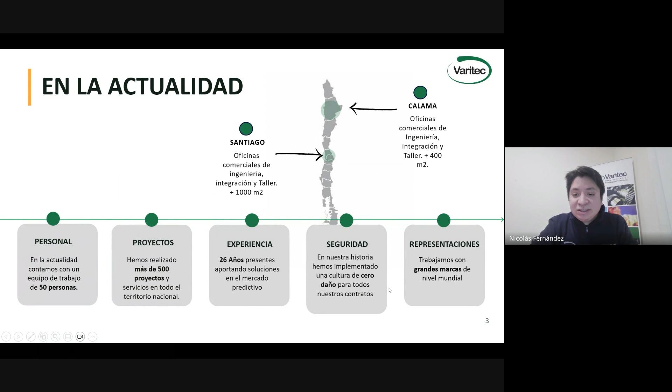Para bajar un poco a la parte más técnica: las marcas que trabajamos e integramos son PCB Piezotronics y Endevco, el área más potente en instrumentación, monitoreo industrial e investigación y desarrollo. Complementamos esta solución con sistemas de adquisición de Dewesoft, y también podemos aportar sistemas de calibración de Modal, una división dedicada a sistemas de calibración dentro de PCB Piezotronics. Esa es una mirada general de las cosas que trabajamos como empresa.

El webinar de hoy se enfoca en uno de los tipos de sensores específicos dentro del catálogo de PCB. El primero se enfocó en acelerómetros piezoeléctricos, después nos enfocamos en micrófonos, ahora vamos a sensores de fuerza, y más adelante vamos a ir viendo aplicaciones más específicas de estos sensores, como análisis modal o mediciones en ambientes específicos, mejores prácticas en terreno y otras cosas en webinars futuros.

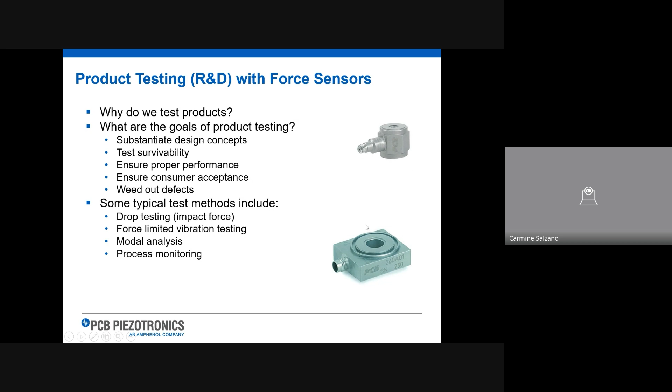You can see from now already two different shapes. A very general purpose one, I hope you can see my mouse cursor. It's a very general one. And this is the ring style triaxial. So they seem different, but they are both force sensors for different uses and, of course, specifications.

Piezoelectric. The difference is that we have two technologies. One is piezoelectric for force sensors, so purely dynamic force sensors. The other one is strain gauge technology for load cells, but these are purely for static. And Nicholas will show both afterwards. We manufacture both sensors. I repeat, piezoelectric for purely dynamic force, which is what we will discuss today. So the difference is very big.

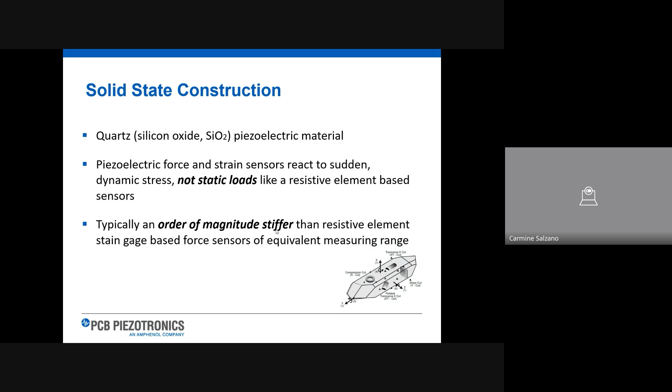I will discuss the stiffness later, but you can see pretty much the quartz bar where we cut and build up our sensor. And the sensor is always built on the principle of the piezoelectric effect, which means any silicon dioxide, when subjected to a force, will have a different polarization of the asymmetric lattice under load, and therefore you will have a charge output.

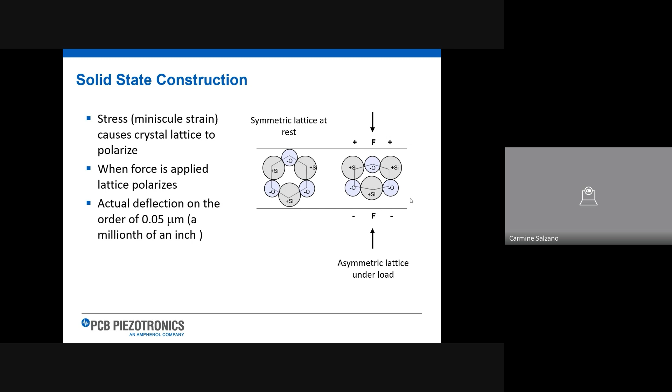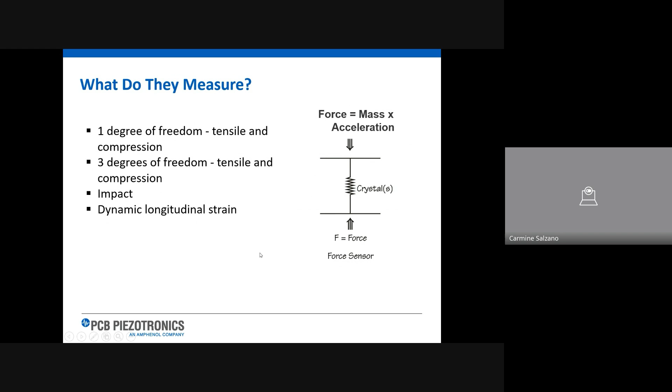With this charge output, you don't have to imagine a very big change in the structure, or that you will see the structure move. These sensors are very stiff. You will not see any movement. But the principle is always Newton's force, because you have mass times acceleration, so you can also measure on this basis. The force sensor, how is it designed?

It is a very stiff metal, and inside, the heart of the sensor is a crystal, like quartz, for instance, and an electrode. The electrode collects all the charge accumulated on the surface of the piezoelectric material. You can imagine a very slight quartz crystal. And the output here, at this point, is picocoulombs per Newton. So it's a dynamic force output, but in charge.

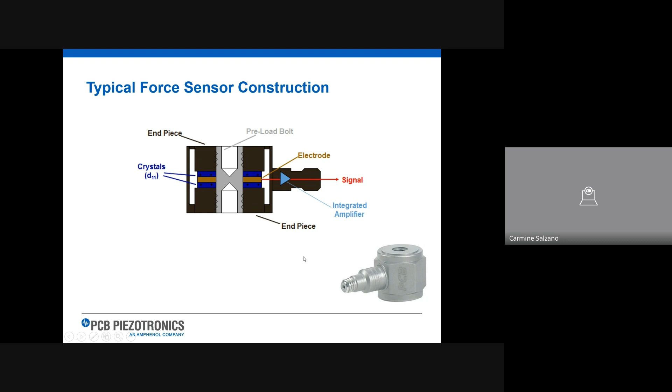However, if you use a MOSFET inside, a microelectronic, with this microelectronic we transform the high impedance charge output to millivolts, so voltage output, which is very easy to handle, not only with the data acquisition, but also using a very long signal cable. So very common today. But we still manufacture both types, charge output and ICP or IEPE output.

You can see a better picture. This is a real one. The 208 series is one of the most common. You will see it's very small, very practical, very wide application because you don't need a preload. Preload is an advanced situation which I will explain when I talk about ring style. So this is simply stud mount, or glue, and measure.

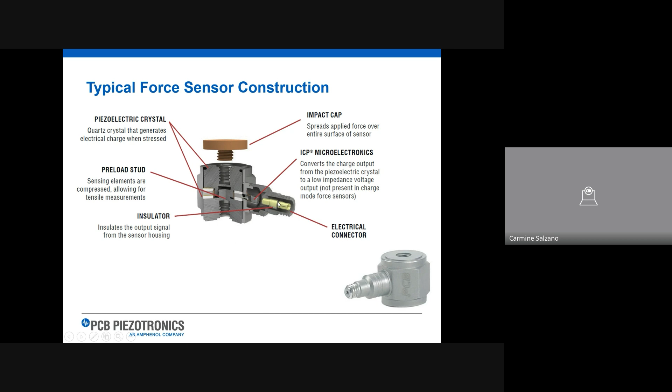You can see the preload; the crystal stack is here, as I showed you before. This is a real picture. You can see how small it is, and then you have just the thread to mount properly either the cap, because this can also be used for impact, or to mount on a structure, and below you can mount the stinger connected to the shaker in case of modal analysis. And then you can see the microelectronic. This microelectronic transforms the charge output to voltage output before going to the connector output.

Specification: as with any other piezoelectric sensor, I would say any other sensor, the sensitivity is the most important parameter because it gives you how many millivolts you will have for each Newton or kilonewton output. Therefore, based on the 5 volt, which is a typical output voltage of a force sensor, you will see automatically the measurement range in compression and tension, because most of the sensors can use both.

Of course, to use tension, you need a particular application for both base and top mounting in order to measure also the tension. What is the maximum static? Well, remember that the dynamic force, the compression measurement range, is just the dynamic portion. You will not measure any static with this sensor. So the maximum static is the sum of static plus dynamic.

Why do we need this one? Because even if the sensor measures up to 10 pounds, it can resist up to 60 pounds, even without measuring. But it is very important to not go above this, because otherwise the sensor will break, even if it has a huge stiffness compared, for instance, to a static load cell.

And then, of course, the typical low frequency, high frequency. The high frequency typically depends on the structure of the sensor. Why such a high frequency range compared to a load cell? Because the stiffness is much higher in terms of design. However, the low frequency depends on the amplifier, the electronics. The electronics can be outside if it's a charge output sensor, or inside if it's an ICP, of course. And with ICP, in this case, the low frequency response is fixed. The rest is something that can be very easy.

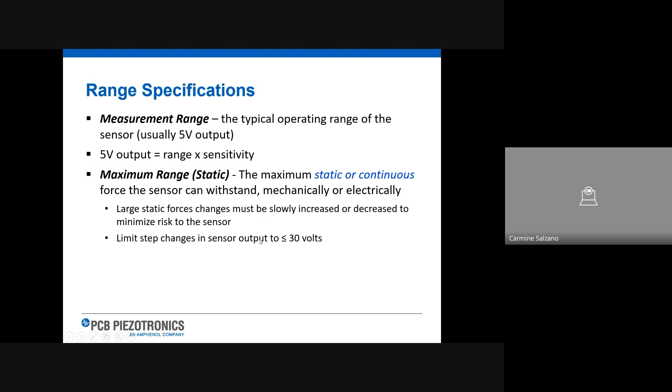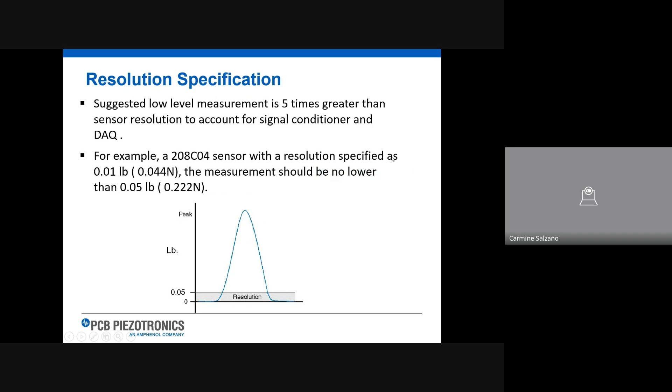So I already mentioned the range and sensitivity that is defined at 5 volts. Once you have the sensitivity, you will see the range, which is simply 5 volts divided by sensitivity. So it's also fixed, especially for the ICP force sensor. Resolution, what is it? It's the minimum level that it is able to measure. So of course you want to stay a little bit above the resolution in order to not measure the noise. But anyway, the resolution and the range define the dynamic range of the sensor, which is very, very broad, like any other piezoelectric sensor.

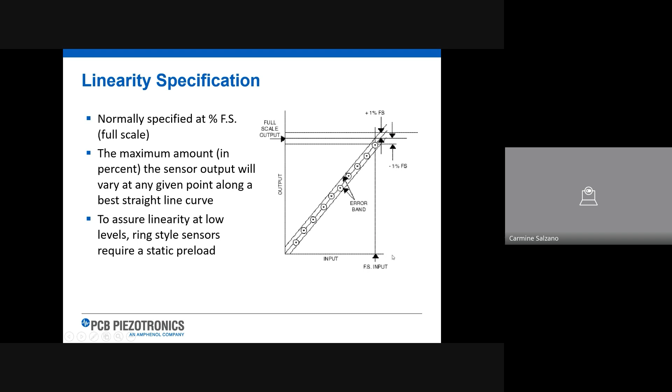Also, linearity is important because it defines the accuracy, which means that when you increase the level, you will stay in this bandwidth, and the sensor has only 1% of full scale linearity, which means it's very close to the straight line, and this ensures the very precise measurement of this sensor. I already explained the response; the resonance defines also the maximum frequency, because once we define the frequency, we can say 20% is the highest frequency you can measure. But of course, all these parameters you can find in the specification, so you don't have to worry.

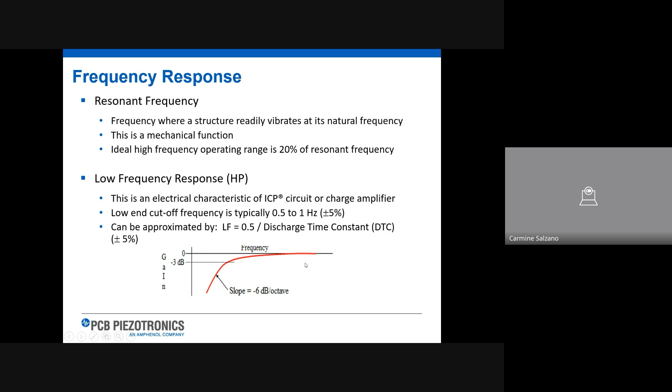Also, the discharge time is connected to the low frequency response, which is the typical response of any filter, which is not straight. So the frequency range is where the curve is flat. Where it's flat, of course, you have the same sensitivity at any frequency. So this is the working frequency range of the sensor. Now let's go to some specific force sensors, because what I said so far is pretty much for any piezoelectric accelerometer, force sensor, or pressure sensor.

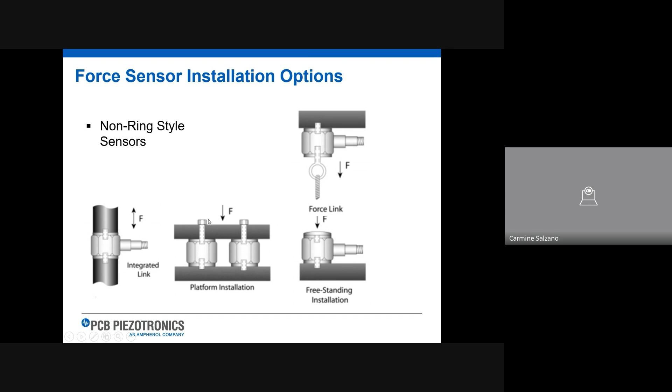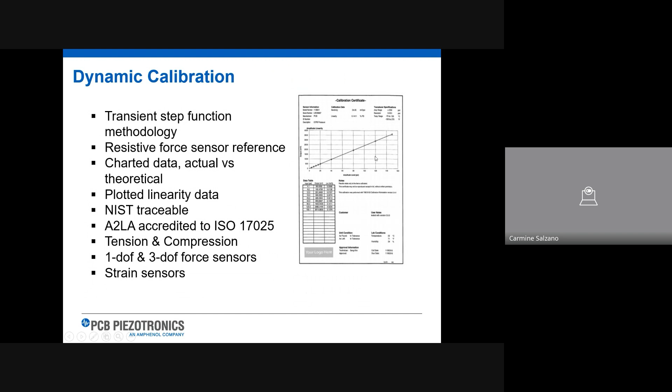Now the application, the mounting, is slightly different. First of all, you need to have a very close mounting base, like for an accelerometer. But in this case, sometimes you want to mount it like a pancake between two plates, because you want to measure also the tension, not only the compression. So of course, you need a particular application. But before looking at this, look at the calibration. Every single sensor is calibrated, like any other PCB sensor, with the linearity and also the specific sensitivity.

Then we have another sensor, which is a ring style. The mounting of this one is slightly different from the previous one, because with the ring style, you need a preload. Why? You need to mount it like a pancake between two plates. And then between them you have a stud. We supply the stud, and the stud is calibrated with the sensor, because in order to ensure linearity, you need a certain preload. So you tighten the torque, the sensor, the stud, between the two plates in order for the sensor to be fixed between these two plates.

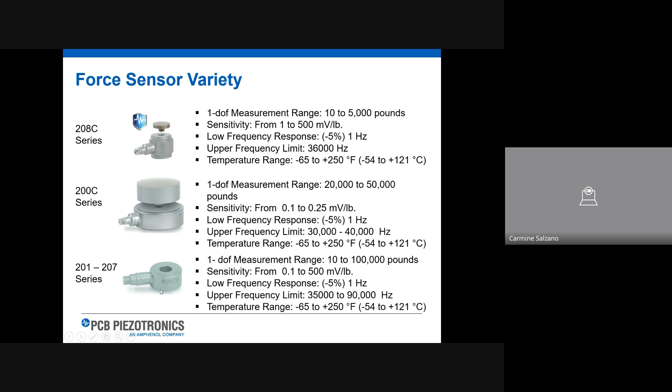This we call preload. And we define how much preload we need to give to this force sensor. Of course, we have a procedure for preloading properly the sensor between these two plates. Only the ring style sensor, this one. This is single axis. But of course, if you want to avoid the preload, then you can buy a sensor which is the same, you can see here, but preloaded between two plates, two interface rings. The same is for triaxial.

These are triaxial ICP, which is also available in charge output, and triaxial with a 4-pin connector with the 3 axes, so X, Y, Z, and this one has a stud, which is calibrated together. If you want to use your stud, you should ship it to PCB for calibrating. However, mounting with its own stud between two plates, you need a preload. Again, preload procedure. Otherwise, you can see the sensor is the same between the two plates already preloaded. You don't need to do anything else in this case. Of course, you need to accept the sensor is slightly taller.

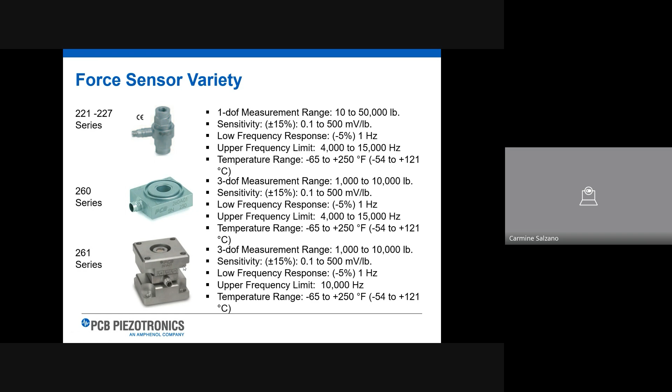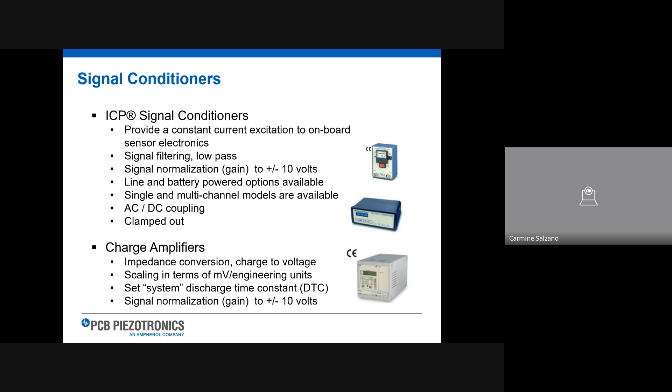Okay, I hope I gave you a little insight about some different shapes of the force sensor. So a force sensor can measure the tip of a shrimp, just to give an idea, up to very high shock and impact. So we have different types of piezoelectric force sensor. Of course, the conditioner, in this case, you can go directly with the data acquisition, but honestly, you can also use a DC coupled conditioning mode only for preloading, because preload is a purely static operation in order to ensure that the ring style model is preloaded. That's another convenience to use, when it's possible, the 208 series, which does not need preload.

And the application, of course, I have no time to explain all the possible applications with this sensor, because also I want to have your questions. So I selected a couple of applications which are covered by papers which you can find on the website. And you can read yourself: in any application, aerospace, automotive, or any general test, even material testing, drop test, quality control, component test, you can use a force sensor to measure the actual dynamic force on the sensor.

But it's not only dynamic. For a few seconds, you can keep also the static with this sensor, because the microelectronics inside the sensor has a long RC circuit. So the DTC is very long. So you keep it static for a certain while. But of course, not like a load cell. And Nicolás, right after, will show you this simple demonstration.

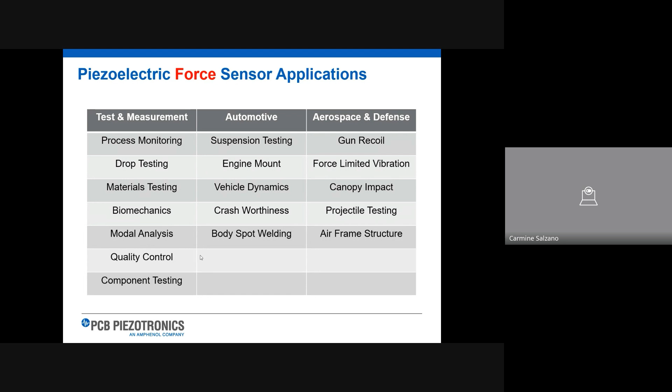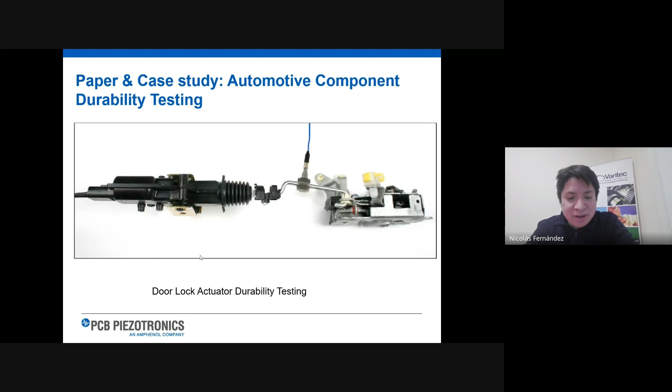So let's start with the final part of my presentation. And I really apologize if I've spoken too fast, but let me know, Nicolás, is it so far too fast? Yeah, it's okay. I think maybe a bit slower is better. But okay. Okay. I will slow down now during the presentation of the two cases before my conclusion.

First of all, this is a car door lock, right? You can see these are mechanisms used to lock the door of the car. So very common. And of course, what do you want to measure? You want to measure the force during locking, right? To open and close the door of the car. You can see here a very simple 208 mounted in this beam here in order to measure the force of tension and compression during door lock actuators working.

This is good, but at this point you can see why we don't use a strain gauge static load cell, which is also a little bit dynamic. Well, let's put up a comparison of different parameters of the technology advantage between strain gauge and piezoelectric. So force sensor, piezoelectric, and load cell, strain gauge. First of all, there's no comparison about stiffness. Stiffness is much higher in piezoelectric. Also dynamic response, of course, is very high.

So I don't want to go through all this. You can see even the range is very high. Sensitivity is very high. Temperature effect, everything is higher. Where is the only bad point of piezoelectric? Of course, it is static. Because if you want to have a purely true static, then of course you need a load cell. But a load cell is much bigger than the other one.

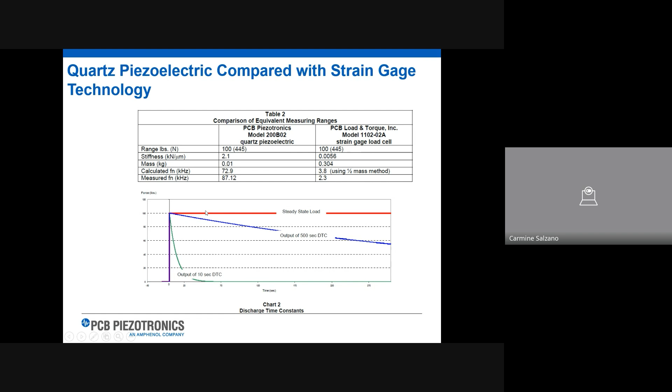Now we can see, however, the static response in this case. As you can see here, the discharge time constant is how long it can keep the static. You can see they are both the same range of Newton. The stiffness is different. The mass is also different, and of course the frequency. But if you have an event which is quite small, short, the sensor is able to measure very short events, slightly bigger, because the DTC is 500 seconds in this case. And then you have the steady load. Steady load is a load cell, only if you want to use, in this case, a load cell.

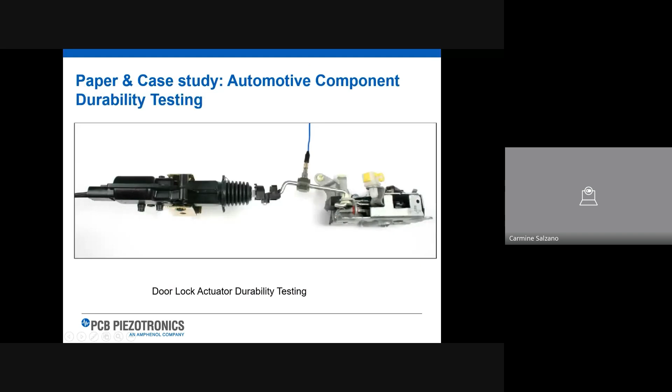Let's see the comparison, and this is one of the most important reasons why, for this kind of application, you cannot mount a load cell, because it's too big. Okay, therefore you can see the sizes. There is no comparison, right? So for this application, absolutely you cannot mount this load cell. Okay, and also this is a final remark regarding the frequency.

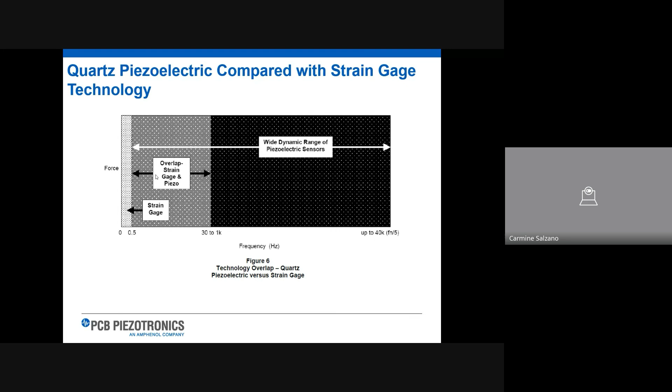So when you want to measure up to 0.5 hertz or below, very close to 0 hertz, strain gauge technology, so the load cell, is the only choice. When you want to measure from 30 hertz up to any kilohertz, then of course the piezoelectric sensor is the only hope. When it's between 0.5 hertz and 30 hertz, in this gray region, this is an overlap, which means eventually you can use both. But in this case, of course, there are other questions like dynamic range, like the size, and so on. So in this case, you can make a comparison in this range. Okay, that's the first point.

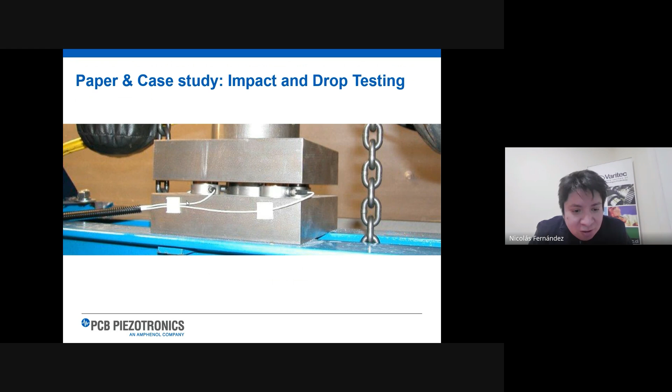I don't know, Nicolas, if I was speaking slowly, if I can stop for a second to wait for your questions eventually. Let me know. Hello, Carmine. I think it's good speed. Before going to the last case study, is there any question? Or do you prefer to take questions at the end, okay? Sí, I think es mejor al final. Okay. So, is the speed okay?

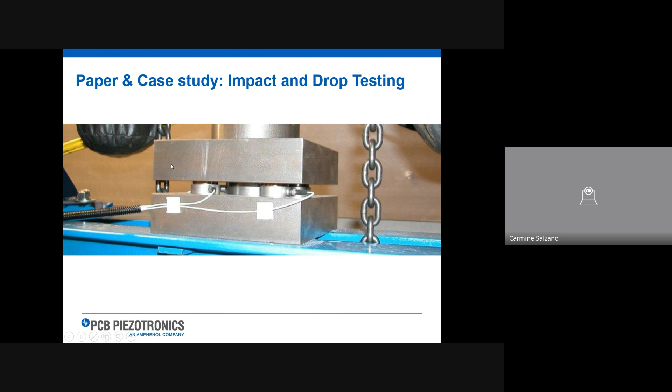Yes. Okay. Now, the second one is an example of impact drop. Again, in the automotive world, you can see this is a bumper test. It's a bumper in a machine. You can see this machine. The crosshead here is equipped with four force rings. Force rings, as you probably remember, need a preload between two plates. Like this case, you can see 1, 2, 3, 4 sensors between two plates. In this case, we built a force plate inside this crosshead.

Now the crosshead mounted on the machine hits the bumper. The bumper you can find on the highway or wherever, right? So it's very important to test the bumper to see if it resists the crash of the car. So you can see the bumper in this impact, and it is measured by this force plate. Why a force plate with four sensors? Because the level is very high. Mounting four, you can multiply the range of one sensor by four, and you can see the force and the total energy.

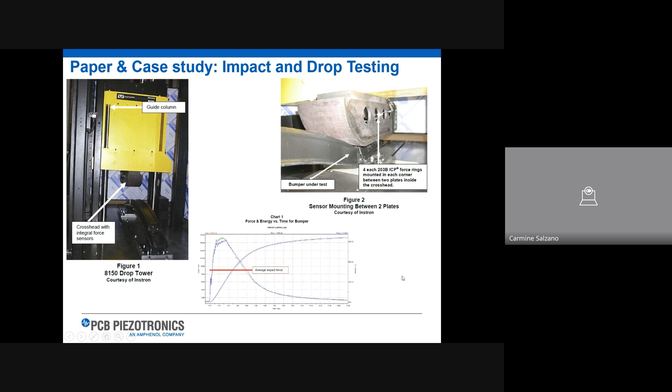So which was the choice? The choice was this sensor, just because you can mount in a force plate with the 4 units. You can see 3, of course, because the other one is on the other side, mounting each one in a corner of 4 square plates. And of course we chose this sensor here, 203B, for the ranges, okay? The impact range.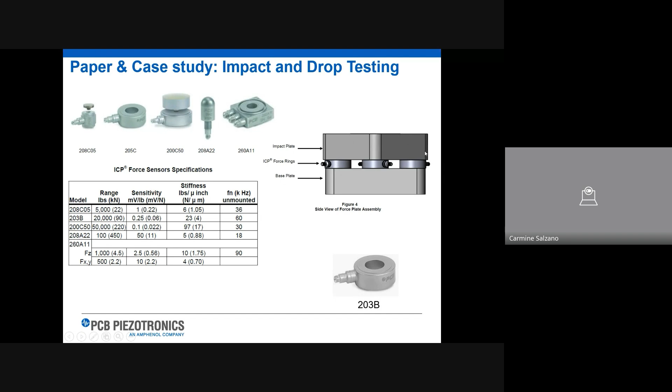So the range of 203 is like 90 kilonewton times 4, because you use 4 in this kind of plate, and the plate is mounted inside the crosshead. So everything is subjected to impact, and the impact spreads all over the plate and equally excites all the force sensors at the same time. That's the concept of force plate. Probably you can see better here. You can see the force 4 plates.

Now you can see something different, because of course the F in the 3 directions, X, Y, Z, you can measure, okay? Simply online or offline. It's very interesting because in this case you can measure the total force in the 3 axes. But look at this, you can measure also the moment. Yeah, because if you multiply the force in this direction times the distance where you mount the sensor, then you can measure it. Okay, that's a formula.

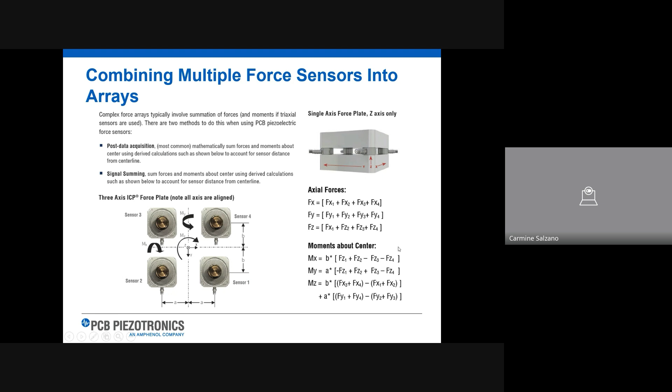So the very interesting thing in this force plate is that you can measure the total force in the 3 axes and the total moments in the 3 axes. So you can see how it's important not only for impact, but for any other application. Okay, now keeping this concept, we go to the satellite test.

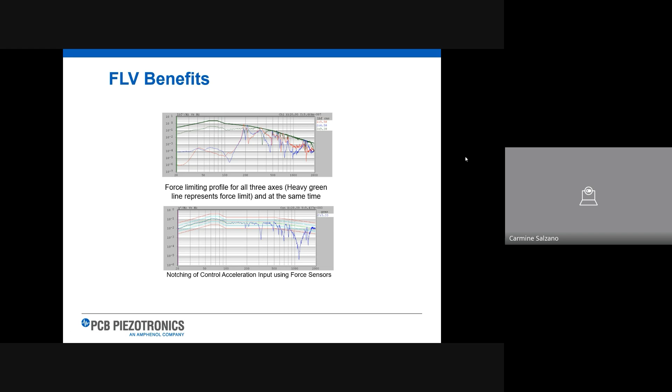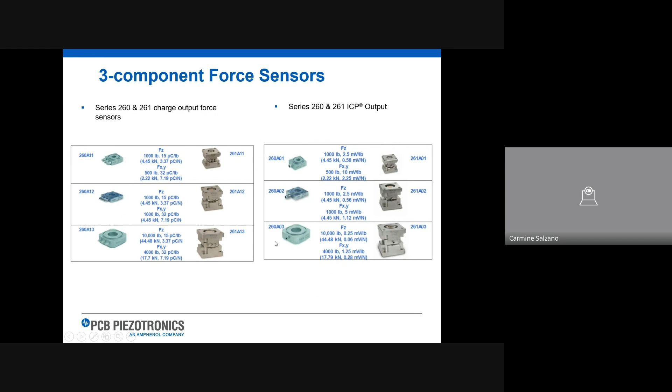I will go very quickly, but here in the satellite, you want to notch, you want to make sure you do not overstress the satellite, otherwise you damage the satellite, and you know the problem. So it's not enough to notch only the feedback through the accelerometer, but also through the force sensor. You can see here, charge output and ICP output force sensors, ring and link.

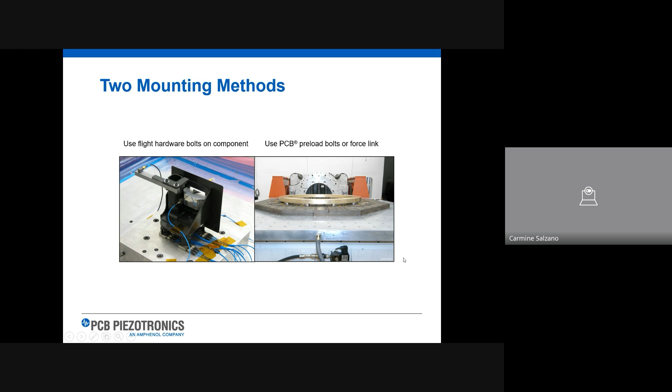You can see that without any plates, you can measure directly the force on the component bolt. However, here you have 2 plates prepared by the customer, and the total force is spread over them. It's divided by single sensor, of course, in order to achieve the wanted total force. Again, you can see the now familiar total force and total moment calculation. Sometimes you can do it in real time.

Okay, I would like to take a break before the conclusion to show you a unique sensor. I know this is not a force sensor, but when you deal with force sensors, sometimes you need a strain gauge, foil strain gauge, to measure the strain. But in this case, the strain gauge you cannot dismount. However, this is the only reusable strain gauge.

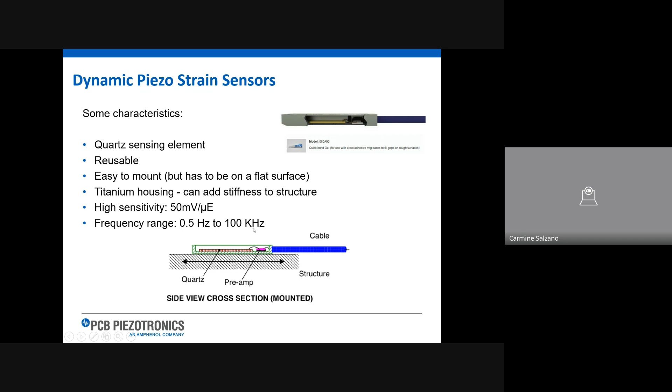You can see a quartz plate with the ICP, so ICP output. You can simply glue it with this glue. You can see the picture of the sensor inside, and it is the only reusable strain sensor in the world with high frequency. Of course, it's purely dynamic, but very high frequency and very high sensitivity. This is an application here mounting on a snowboard on ice, where of course you cannot mount any strain gauge foil. However, these gauges were mounted during snowboarding.

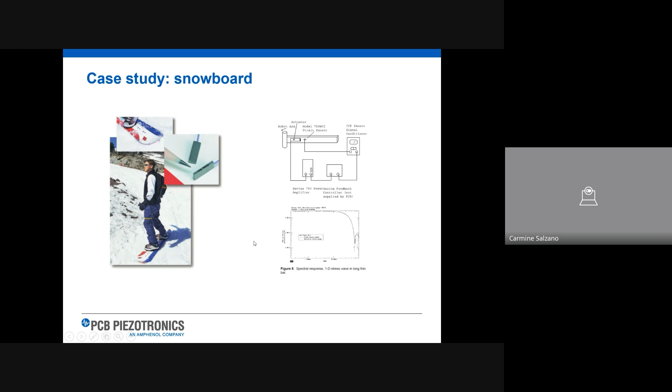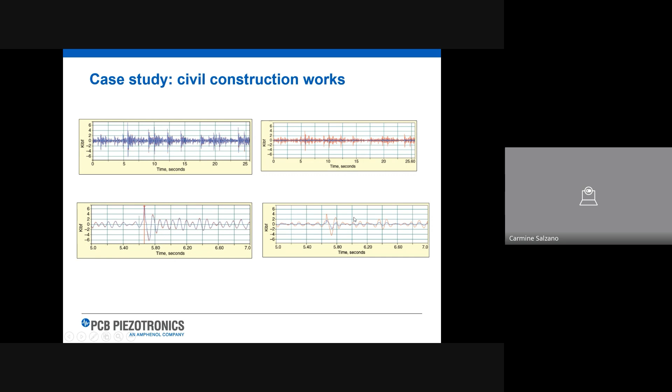Another application is in civil construction. You can see the difference between the foil strain gauge and the only reusable strain gauge. Mounting on 2 different pillars, it's very easy to discover pure axial loading and axial plus bending loading on 2 different columns in the civil construction work.

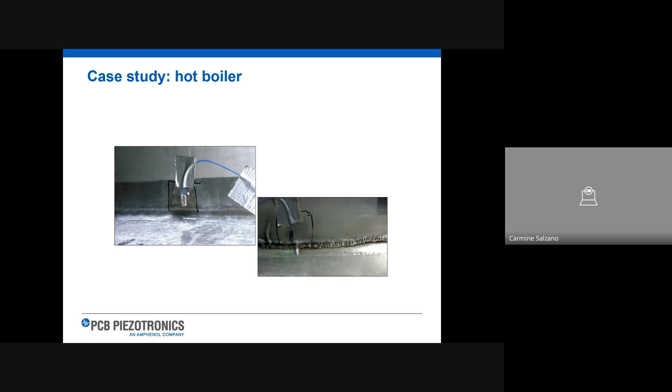But as a final example, very quick, because I have a dedicated presentation for this sensor application, is on a hot boiler at 80 degrees Celsius during operation, where you cannot mount a foil strain gauge. However, the sensor is able to define not only the good and the bad boiler, but also the frequency, in order to see also this parameter compared to the accelerometer.

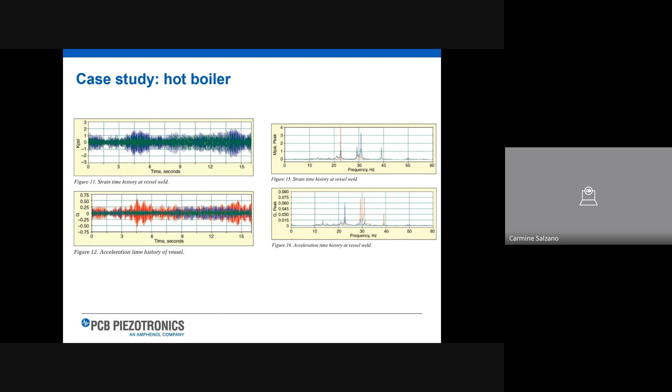Okay, I conclude my presentation. Thank you so much, and I'm sorry if I spoke too fast, but really I would like to leave the time to Nicolas and to your questions and my answers. Thank you very much. Muchas gracias.

Thank you very much, Carmine. Okay, I'm muting myself. I'm waiting for questions before your nice demo.

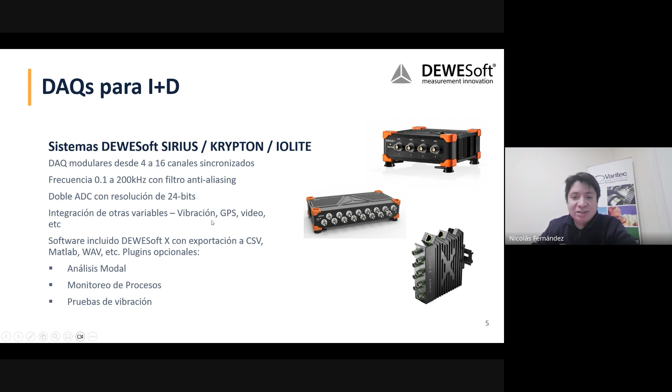DEWESoft siempre va a incluir un software base con el cual puedo exportar datos e integrar directamente variables como video, vibración o GPS, etc. Tengo a continuación una pequeña demostración dentro de DEWESoft.

Debería estarse viendo la cámara. Tengo conectado en este equipo 4 entradas para sensores piezoeléctricos, en las cuales tengo un sensor de fuerza con un filtro pasa alto de 0.1 Hz. Este es un sensor de 500 libras de fuerza, o 2.2 kilonewtons, montado sobre una celda de carga del mismo rango, también 2.2 kilonewtons. Esta celda tiene un filtro pasa bajo de 1 kilo, que en realidad no es nuestra frecuencia de interés; sobre esa frecuencia vamos a ver más bien ruido.

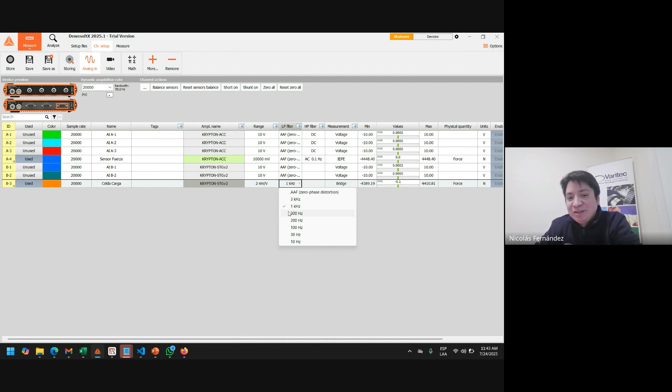Quiero hacerles notar las especificaciones técnicas de este sensor: puede medir hasta 2.2 kilonewtons y su peso es de 22 gramos. Si lo comparamos con la alternativa, con lo que pesa la celda de carga sobre la cual está montado el sensor, esa celda pesa 2.9 kilos. O sea, el mismo rango, con dos órdenes de magnitud de diferencia en peso.

Aquí están las mediciones superpuestas, sincronizadas con video. También tengo aquí otros sensores triaxiales, y para acoplar dos estructuras, force link sensors, que son triaxiales. Algo interesante que podemos ver inmediatamente: aquí tengo una forma de onda, una señal cruda, escalada al máximo, con el factor de escalamiento correcto del sensor según su certificado.

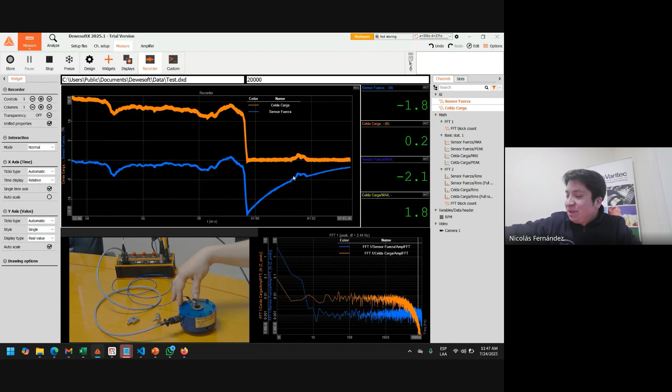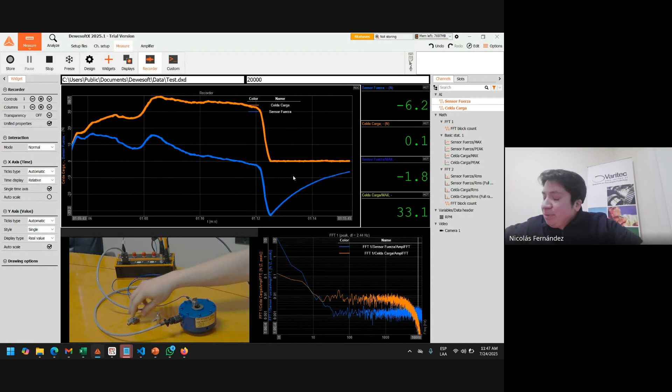Una cosa interesante que puedo generar con esto es que lo que significa precargar es que tengo que someter al sensor a cierta fuerza para ponerlo en su rango de medición. Específicamente en este sensor viene precargado, así que no es necesario hacer esto, pero por ejemplo con este modelo tengo que ejercer una fuerza específica durante la instalación.

Pero poder ver la diferencia entre la capacidad de medir una señal dinámica y una señal estática es el propósito de esta demostración, y también poder ver el nivel de ruido que beneficia al sensor de fuerza piezoeléctrico, que es especialmente útil, por ejemplo, en aplicaciones modales, donde estoy correlacionando esta entrada del sistema de fuerza con lo que sería, por ejemplo, la salida a través de vibración, sensores de aceleración o sensores de strain gauge conectados a la estructura.

Pero es un sensor que tiene una salida más amplificada que una celda de carga, y puede también medir cosas más bajas. Y también el tema del peso. Estos dos equipos pueden tener el mismo rango de medición. Para aplicaciones dinámicas, este es mucho más compacto, es más fácil de instalar, más barato de instalar, hay menos cables que recordar. Este cuesta menos, es menos sensible al ruido.

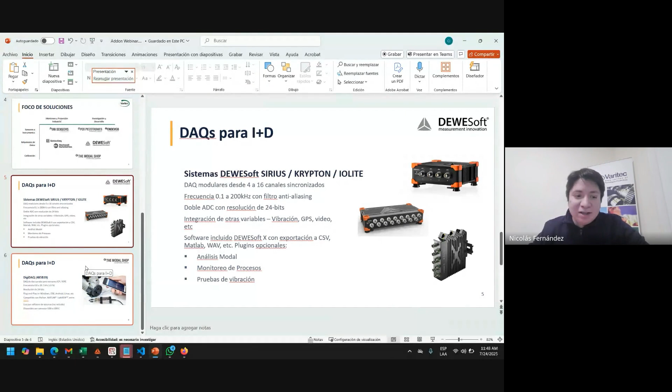Bueno, para cerrar, volver aquí a la parte de DAQs. Esto es un equipo Krypton dedicado con distintos canales para celdas de carga y sensores de fuerza. Realmente puedo conectar básicamente lo que sea. Y eso es como la demostración práctica para estos equipos.

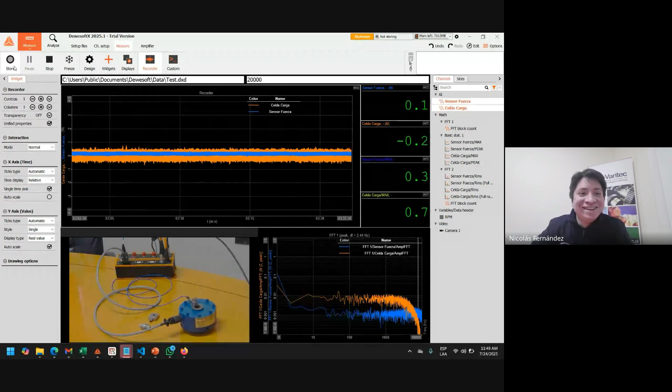Hola, buenas, ¿se escucha? Sí, sí. Gracias por el seminario, el webinar. La pregunta que tengo es que trabajo haciendo ensayos de impacto o de drop test.

Y la pregunta es si hay alguna forma con el sensor 208C05 de medir la energía. Energía, esto implica área, ¿cierto? Esto implica un cálculo donde entra el área, ¿correcto? Sí. Carmine, para medir energía.

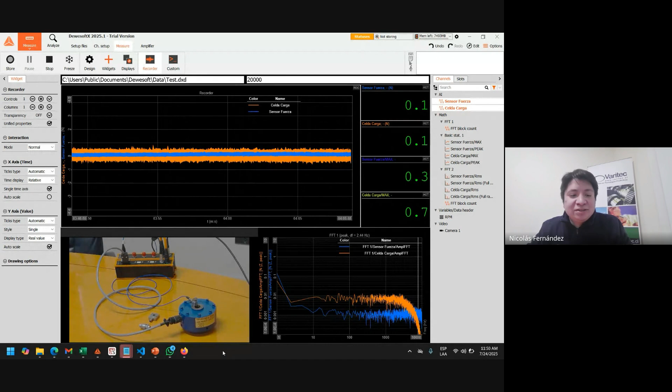So the only thing I can do, I can share my screen again. And I'll share where Nicolas will send you this presentation here. Hold on a second. Let me share my screen here. Can you see? Yep. Nicolas? Okay. Now, let me remember where I should take this one.

The energy. Okay. Force should be somewhere. Here's force preload. Creo que es, I think it's the drop test paper. Is automotive, yes. Okay. Is automotive. Hold on. Is in the automotive world. And

Yes, component durability, but not this one. Is in the white papers of force. I think it's the one I shared. It's on the Force. Yeah, this one. Anyway, one of these we show where to take this application, and I will send this paper to you, and you will see how to measure the impact. Is exactly the one I showed you before, the impact drop test, okay. This paper there. Hold on.

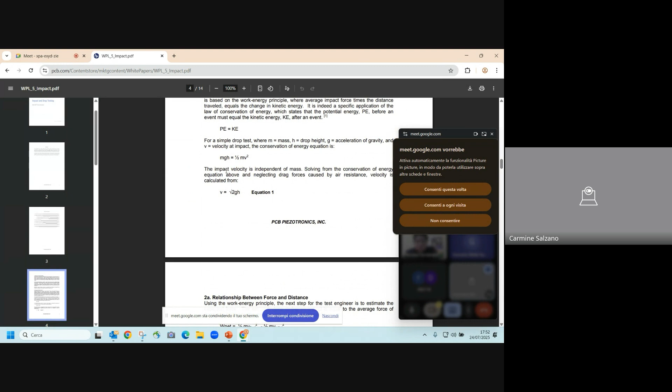No. White papers. Okay. Now probably I can share. You will see during impact the force calculation and the energy. Okay, you can see now. Can you see? Yep. We can see. Can you see?

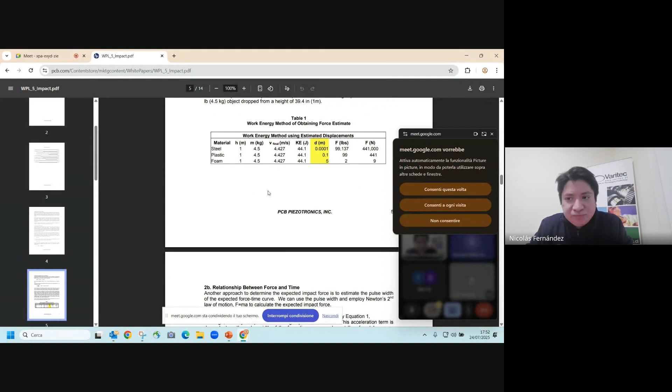Este paper lo compartí en el chat por si acaso. Está para que lo vean directamente. Can you see? Yeah. And the total energy, you can see acceleration. Drop test example is the one I showed you before. Okay. Can you see the energy in joule? Okay. Clear?

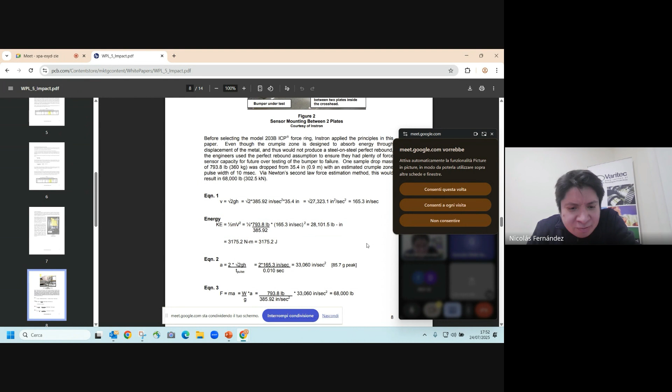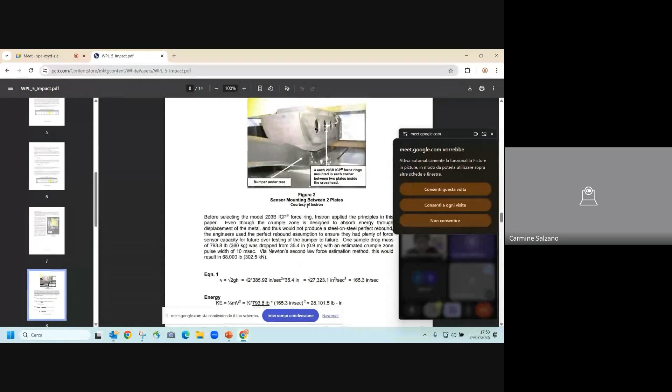What do they need for this calculation? Is this just well, to measure the force, and then they can go to calculate in this way. Okay. Just follow this paper. Of course, the sensor is different, but anyway, they will going to measure the force anyway. Okay. I will send this paper.

Sí, lo vamos a romper ahí. ¿Qué sensor están utilizando en este caso? El 208. 208 C05, I understood. Right? Sí, ese mismo, 208 C05. Sí, sí, sí.

Este es el de mayor rango. Sí, ahí hay una fórmula, en realidad, básicamente no sé si es la forma matemática de calcular esto, pero también entiendo que aquí no está tomando en cuenta el área en la cual se aplica la energía. Pero te recomiendo en realidad revisar este paper, si quieres podemos ir revisarlo, te lo voy a mandar y puedes responderme y juntarnos a revisar cuál es tu setup de medición, pero este es un buen punto de partida para calcular esto usando este sensor. Dale, muchas gracias. Okay, thank you for your question.